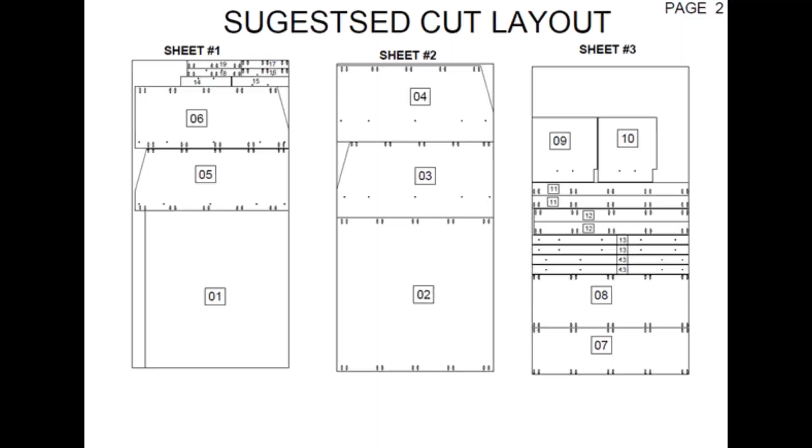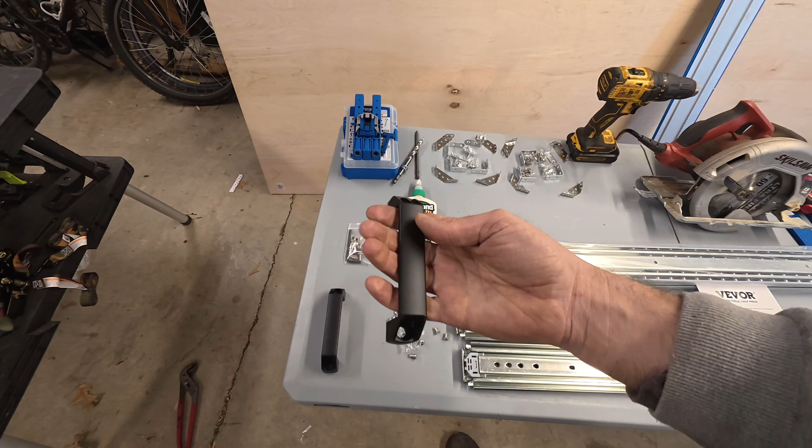I wanted to make sure I had a solid design for my box, so I actually started a few months ago and I've been testing it out. To save time, I'll go over how I built the box and we'll focus the rest of the video on the harder details. The box consists of 4 main vertical members seen here.

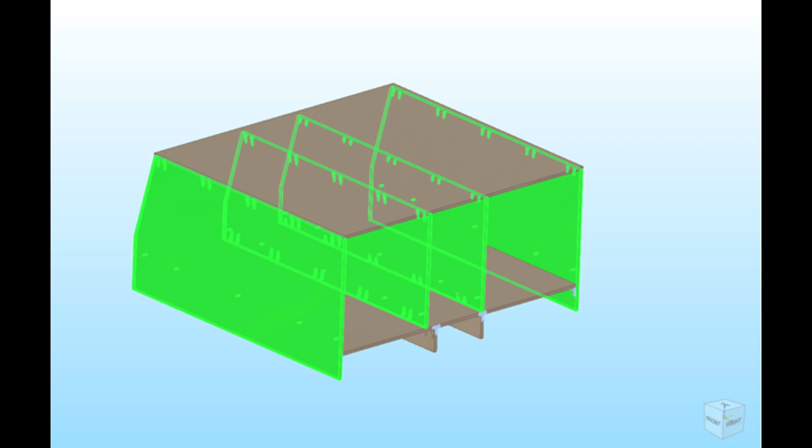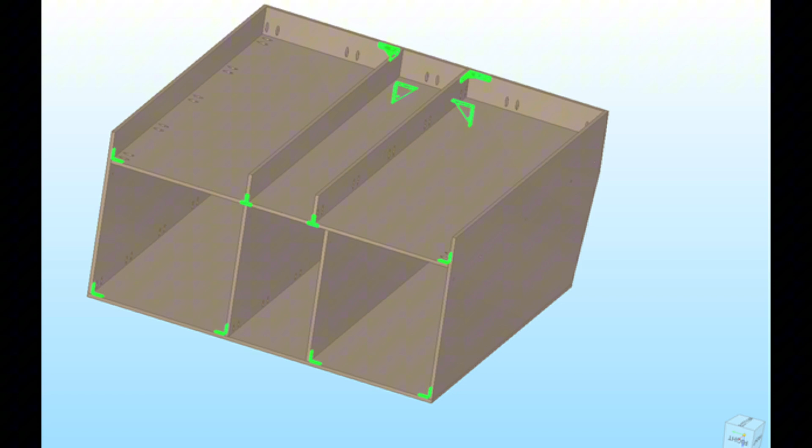These components separate the box into its various compartments and distribute the load. 2 large panels of plywood make up the top and the bottom structure. In testing, I found that additional braces on the back of the box were needed. They're shown here. 2 dividers are also needed on the bottom of the box to hold the weight. Finally, a number of metal brackets are used to help tie it all together.

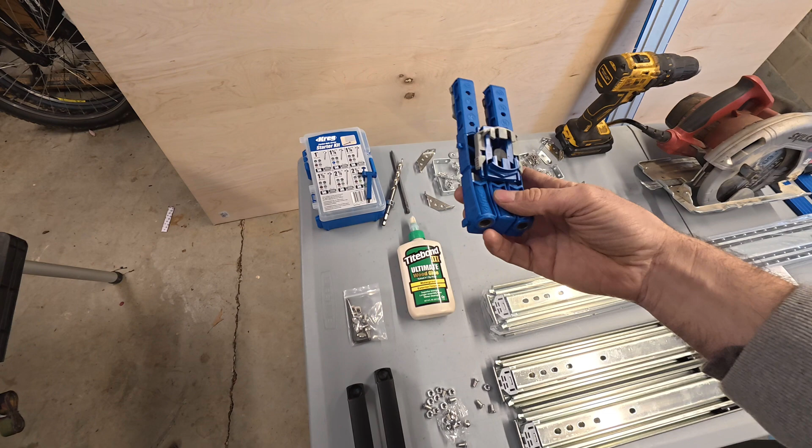Tools required are going to be a circular saw, a drill, tape measure, some kind of straight edge. I am using one of these pocket hole kits from Kreg. I just think it makes it a little bit more of a professional finished job.

I did not use that. I just used simple screws when I was putting this one together, and that's held up just fine for dozens of trips and thousands of miles in the car. So on those, we're just edge screwing, but wanted to try to do a little bit nicer job on the drawers, so I'm going with that today.

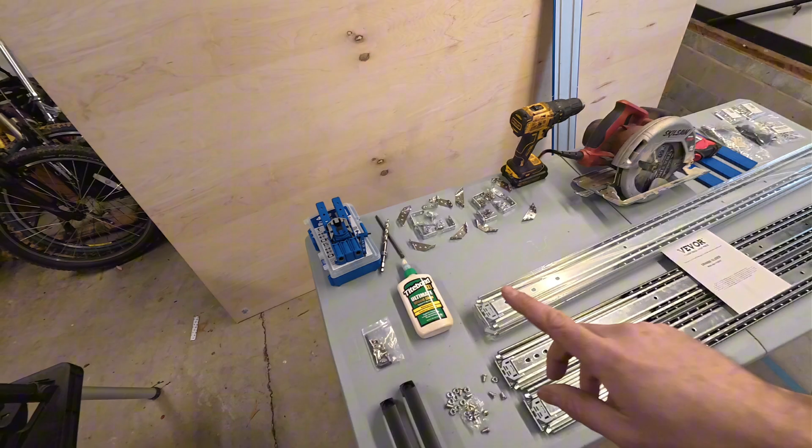Now, one of the first things to make sure you're doing when you get your box built is to make sure everything is square. I didn't always have this support positioned really well, and I'm going to be adding a second one during this to help keep it from bowing, but there is some bow in my box. You can see I have it clamped straight there, and you can see the bow.

I can get my finger in here. So before I attempt to make any drawers today, we're going to pull the box back into square, so that way we take the bow out of the lid, and we'll be doing the same thing on the bottom, and that should make everything laterally quite a bit more stiff, and we'll see how this works.

Now, the length of screw that you need for the pocket screw changes depending on the thickness of the material. So if you're going to do this job, make sure you put these braces in the first time around. Definitely needed.

Moment of truth. Take the clamps off. See if it's springing the things the wrong way. So that is a lot straighter than what we had. We're going to do the same thing along this bottom edge.

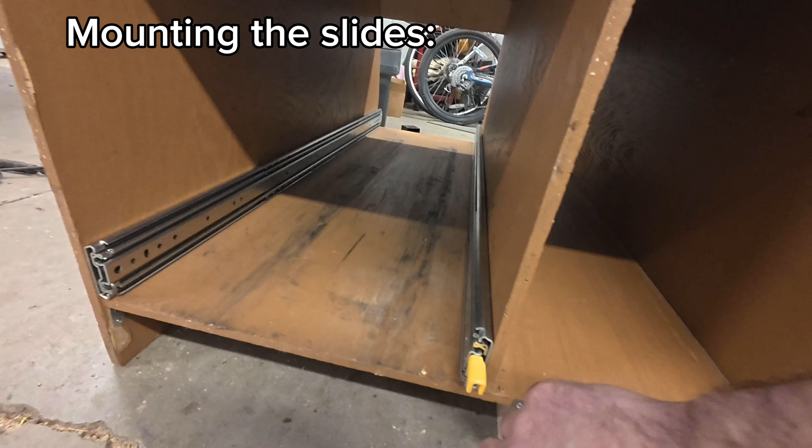Now I'm going to work on starting to mount my first 2 sets of slides. Warren, you want to mark this one?

As I want a 1/2 inch gap underneath my drawer when I'm done, I'm going to basically build it that there's the thickness of this plywood to keep it all separated when we're done. So you can see here, these are the holes we're going to be dealing with.

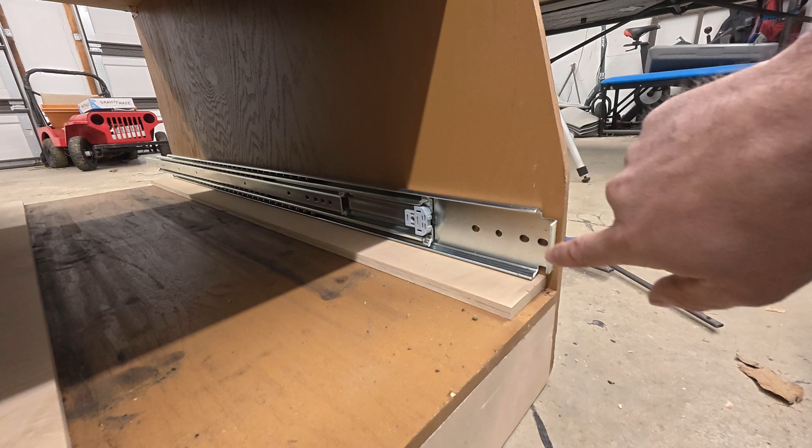I'm going to put some barrel nuts through those. So the binding bolts that we're trying to use are for a 6mm thread, and we need to drill the outside just ever so slightly. Like some of these it actually fits, like that one fits, this one's a little tight. So the ones that are a little tight we're going to drill with a 5/16 hole. That'll give it about a tenth out clearance, I think.

We want to be really careful with the metal chips. I'm going to sweep all these up because I don't want them to get into the rollers. I want to test to see if these will clear once the slide comes back. And it appears to clear really nicely on that one. So make sure when you get them in, you actually give them a try. There's access holes that line up with the other features, so that way you can assemble.

That's good. There's going to be one more out here at the end. And that one's a little tight, so we're going to drill that one.

While we're thinking about it, let's test our other barrel nuts or binding studs in here that'll go to the drawer. So these are M5 binding studs, and looks like they have a little bit more clearance on these.

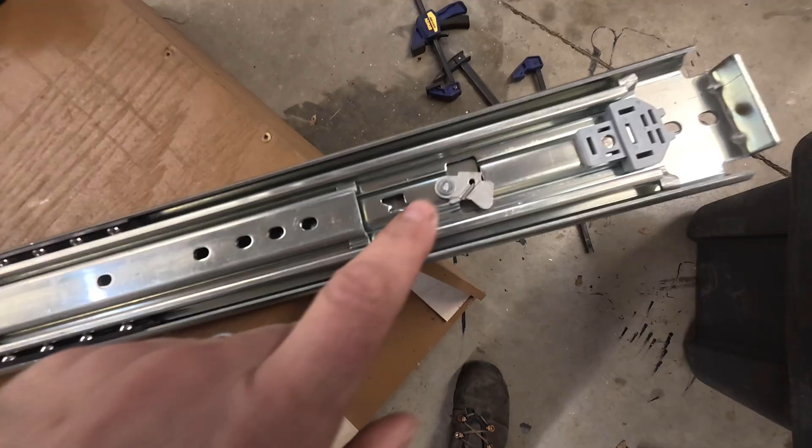There's also access holes in this intermediate piece to install those. So this is actually the mechanism that will lock it out. Right, so here's the first lockout position. See that? That is now locked in place. And this, when this comes back in, that is going to depress that feature and let it move.

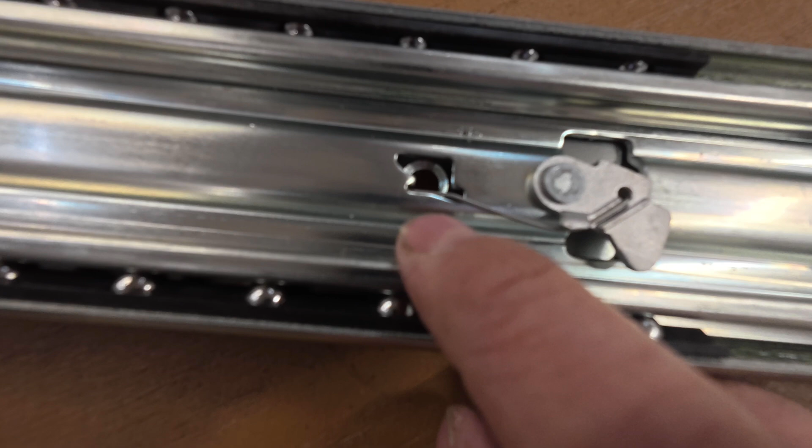Now, something I've noticed on the lockout slides, where this lockout mechanism crosses the hole, there's a hole directly below. You can see it through that right there. You can't have anything sticking above those. So on those particular holes, which is going to be this one next to the VEVOR label and the next one up, for those we are going to have to use the provided flathead screw, which is also an M6. So that just means the binding post is going to come in from the other side.

So on the front side here, I've made the slide flush with my front of my plywood, and I'm coming through this hole to put a clamp in. We're going to take that same 5/16 drill bit and start working our way, putting in the binding nuts.

This next hole forward here that I drilled, this is one that is going to need to be zero clearance to clear the locking neck. So the hardware that comes with the slides is the zero clearance type.

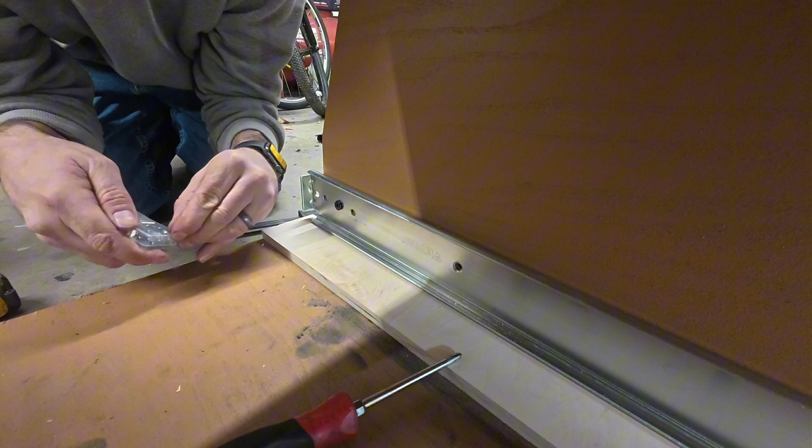For this position, the longer binding studs that I have in the directions are ideal, but where you have to have zero clearance, you're gonna want to use the shorter ones, I believe 10 millimeters long versus 16. So the back two are the only ones gonna be able to get with that until I move the slide.

So I'll meet you on the front side. I can undo this clamp. The front one, I believe, is gonna be able to handle one of the longer binding studs. So the long ones come in from the front.

Line up the next hole and repeat. This one comes in from the other side, but this one's going to get one of the binding assemblies.

So with any luck, this should fully retract and lock. That step is definitely one that you got to think through and make sure you get the right hardware. If not, it can catch.

If you're installing this into a sheet metal box, the provided hardware would probably be fine. But the stuff that the slides come with is not long enough to work on half-inch plywood from what I can tell. So these binding posts go by a couple of names - I've heard them called sex bolts, binding posts, binding studs, whatever you call them. They seem to work well for this application.

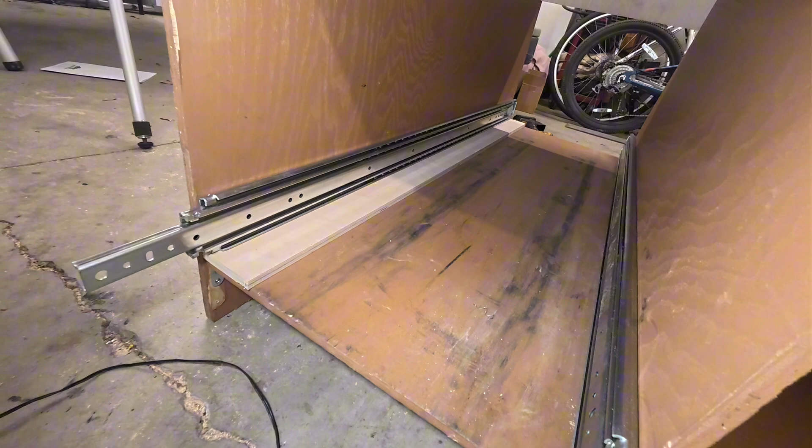All right, so we're gonna do the same thing. On the outer one, I believe that everything will be the longer binding studs, and I will catch up with you as soon as that is done.

So my next step, I have both rails fully secured. These are the two 3-inch tall pieces that are gonna be the sides of our drawer. And now we need to just confirm our measurement here.

I was anticipating this being 14.5, and that looks just about perfect. One of the really important things when you're building your box is to make sure that these two walls for your slides are parallel.

So this is going to be the bottom of the drawer.

Okay, so this might be overcomplicating it, but this is what I came up with for how to hold the drawer square while I can screw it together. So I clamped the 3-inch piece to the outside of my box here and left it stick up just enough that when the bottom of my drawer is sitting on top of the box, everything's nice and flush.

That turned out really nice. So now I've got to figure out a way to hold it for the other side.

There we're going to clamp the 2.5 to this. That'll give this a little lip to sit on. All right, let's see if I can remember the glue on this piece too.